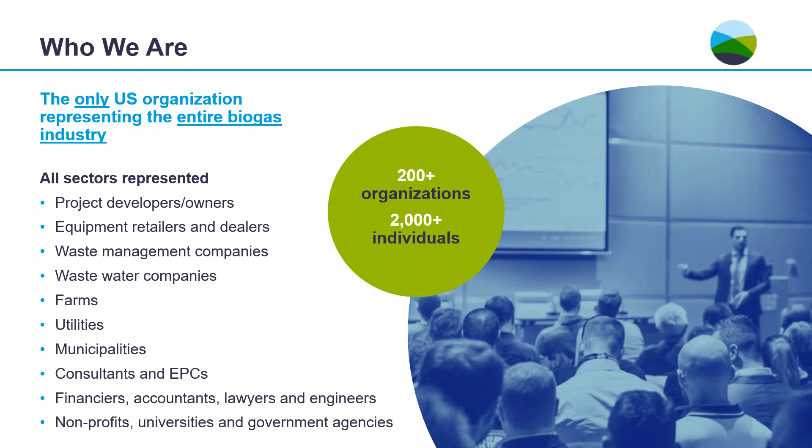First of all, thanks for everyone coming. It's a great turnout and it's appreciated. When we were in Vegas this year, it was very obvious that the market itself, the biogas industry, has evolved quite a bit. I was marked by the idea that it had really changed from something that was very aspirational, you know, at the Red Lion with everyone wearing Birkenstocks, to a situation where we're in Las Vegas with some public companies, a well-funded organization, and real leadership from the American Biogas Council. I was really marked by how it had gone from aspirational to inspirational.

I felt like now would be a good time to talk a little bit about some of the opportunities that the market still has, some of the challenges that can be overcome. We've been talking to the Danish companies regarding the markets and the challenges they've had and how they've overcome them. So we thought it would be a great opportunity to look at some of these lessons learned and potentially take some of that information to help continue to grow the North American biogas market.

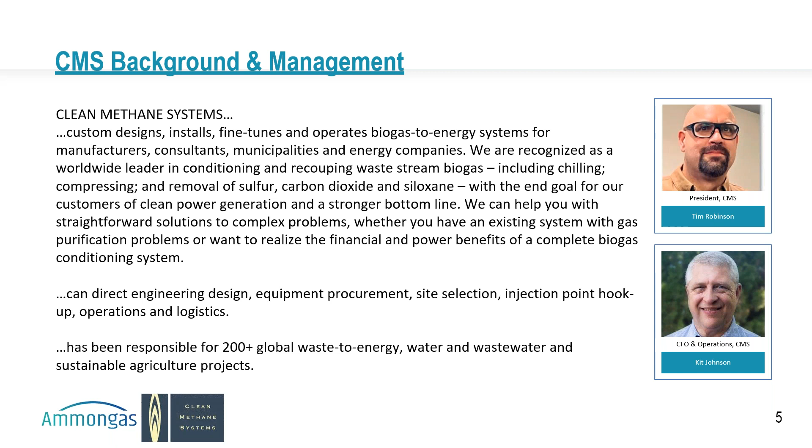So just to talk a little bit about Clean Methane Systems, next slide please. Clean Methane Systems has been in various forms in the industry for quite a long time. It really started with Paul Tower helping Sacramento County with their GE turbines in the mid-90s, where people learned about things like siloxane as it relates to biogas and why the turbines were fouling. We've been in the industry right through the Energy Policy Act and the American Recovery and Reinvestment Act, all the way through, hopefully, the 2022 new legislation coming out here in 2022. The market, we've watched it really evolve over a long period of time and been able to participate. So my goal today is really to help provide some context and lessons learned as these very successful groups from Denmark talk about what they've done and how they've addressed some of these market challenges.

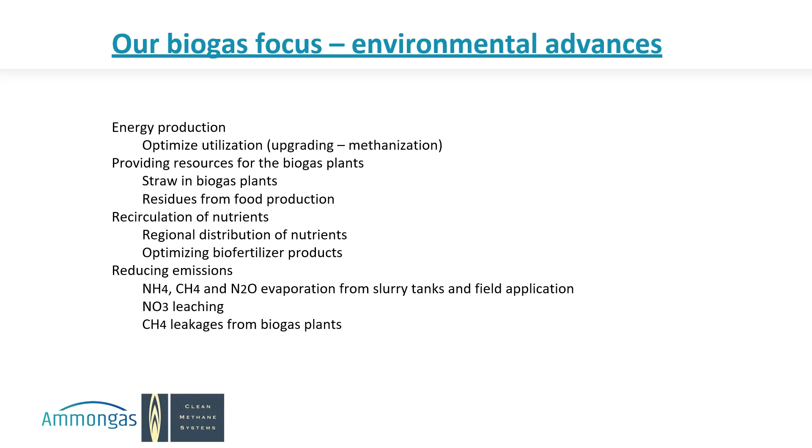Next slide please. There has been a lot of incentives for biogas production in Denmark, and the development of biogas production in Denmark has accelerated very fast the last couple of years. There has been dedicated government support schemes, taxes on consumption of fossil fuels, some restriction on the use of fertilizer and manure on the fields, a ban on organic waste in landfill sites for more than 20 years, and a fee for waste treatment. Most of all, there has been a very big interest from the governmental side to support the development of the biogas sector, including establishing a biogas task force, and support for research, development, and demonstration of various new technologies.

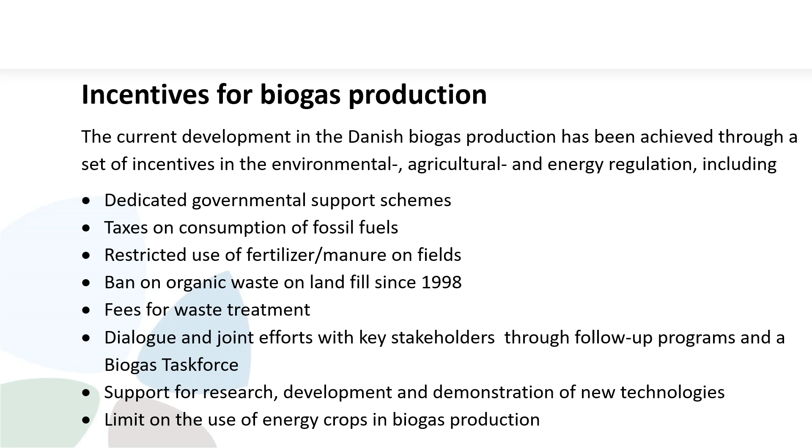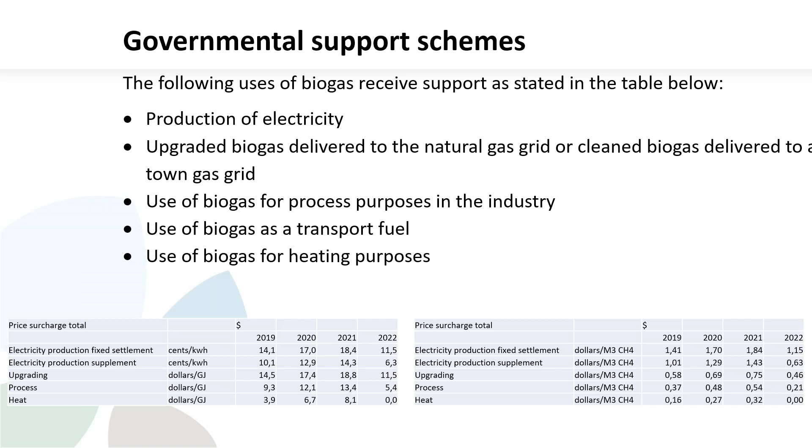Then last year the government came up with a green gas strategy. What role does green gas have in the transition of our society?

This was made last year, but now the awareness and actuality of this has increased because of the unfortunate situation in Ukraine.

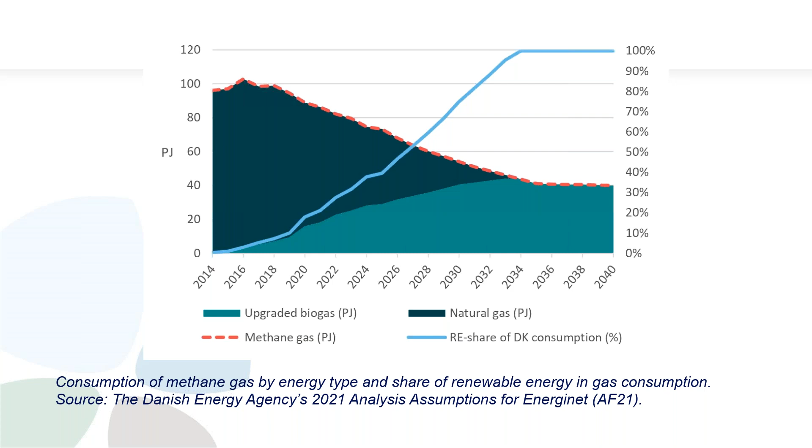We started out with a traditional gas market model where we had a biogas plant producing biogas and using it in a CHP, combined heat and power plant, and used it directly for the consumers.

Then in 2012, we had the possibility to upgrade the biogas and inject it into the gas grid, which is widely distributed all over the country. That increased the possibility to sell the gas to a lot of other consumers, to sell the production all year round, and not only the electricity.

When you make electricity out of biogas on a CHP, you get about 40% of the energy as electricity, and the rest as heat. But for most of the year, we are not able to use this surplus of energy as heat in Denmark. If we inject it into the gas grid instead, we can use all of the energy all year because there are a lot of other consumers.

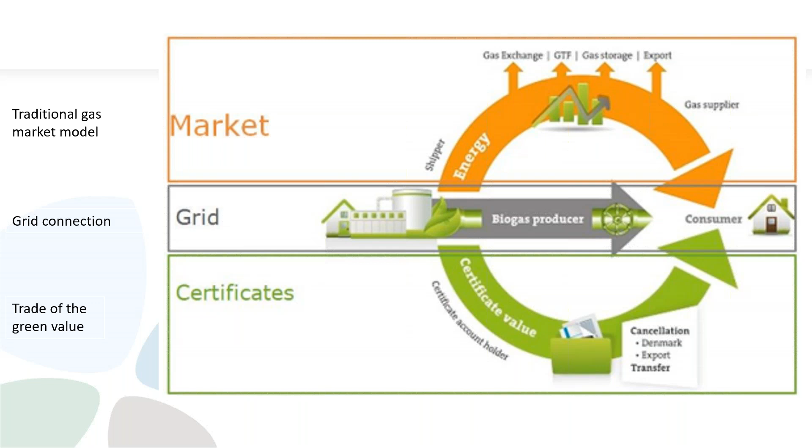That also meant there was an opportunity to trade certificates, meaning certificates that guarantee the origin of the gas as green gas, and a lot of companies were willing to pay an extra price for these green certificates.

In Denmark, we have had a very stable energy consumption during the last 30 years. In fact, our total energy consumption has dropped a bit, and we are very proud of that - that even though society has developed very fast, our energy consumption has decreased.

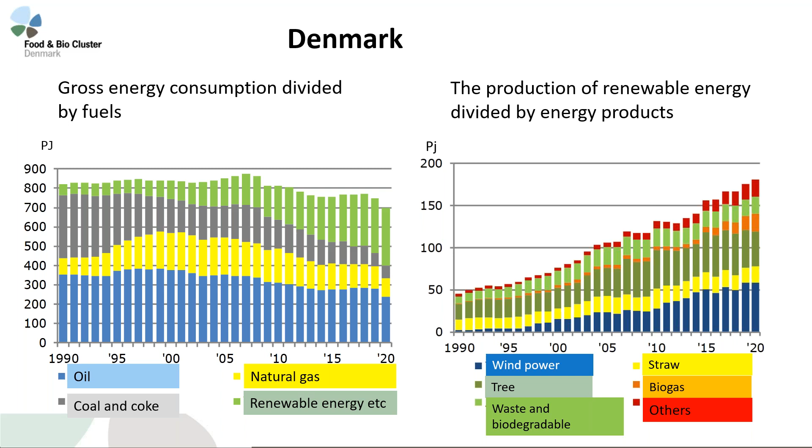On the right side, you can see we have a very long history in Denmark of making wind power, and we have a lot of credit for that around the world. But in fact, it's biomass that makes a bigger contribution to the energy system than wind power does.

This shows the development of the amount of biogas in the Danish gas grid. As you can see, last year we reached about 25% of the whole gas consumption in Denmark as biogas.

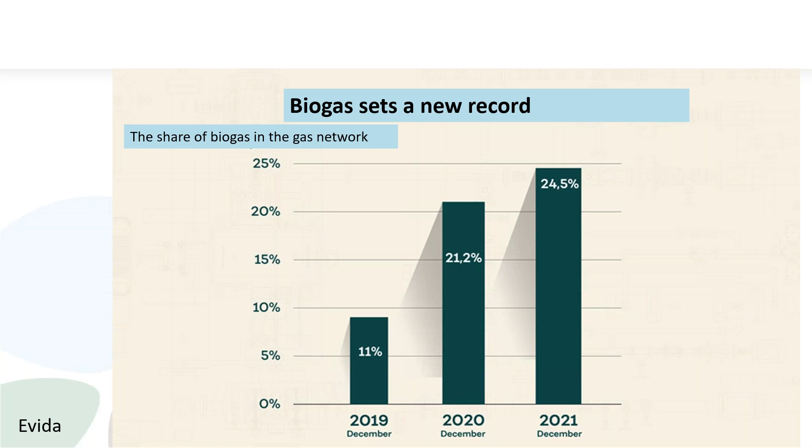This biogas is made of biomasses, and the main part of the input for Danish biogas plants comes from slurry and manure, deep litter, energy crops, and residues from industry. This is for the farm-based plants. We also have plants running anaerobic digestion on our wastewater treatment systems, where the wastewater delivers the organic part. As you can see, only a minor part is done by straw, about 1%, and I'll get back to that.

This means we have a very big input of slurry and manure from animal production, and in fact Denmark has a very big animal production compared to our size, meaning we produce about 5 times as many pigs as we have people.

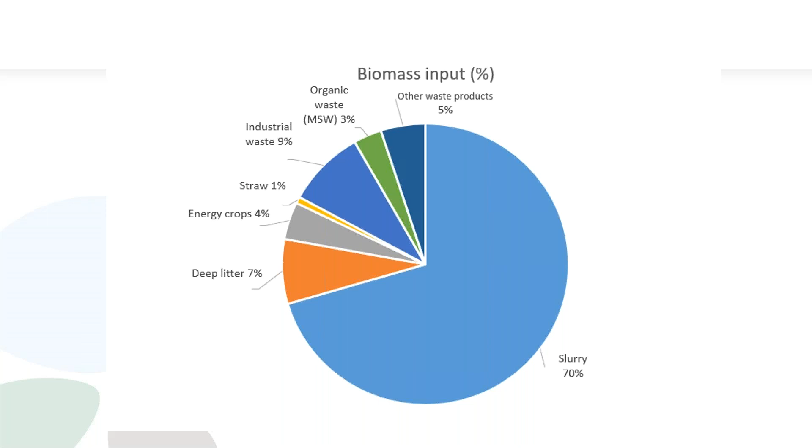We try to optimize the energy production in these biogas plants. As I said before, we started out making biogas plants fed with manure, slurry and organic waste, using the biogas in CHP plants, meaning combined heat and power, normally engine systems, generating electricity and heat.

About 40% of the power or energy coming in is coming out as electricity, and the rest is coming out as heat, either as exhaust air or as cooling water.

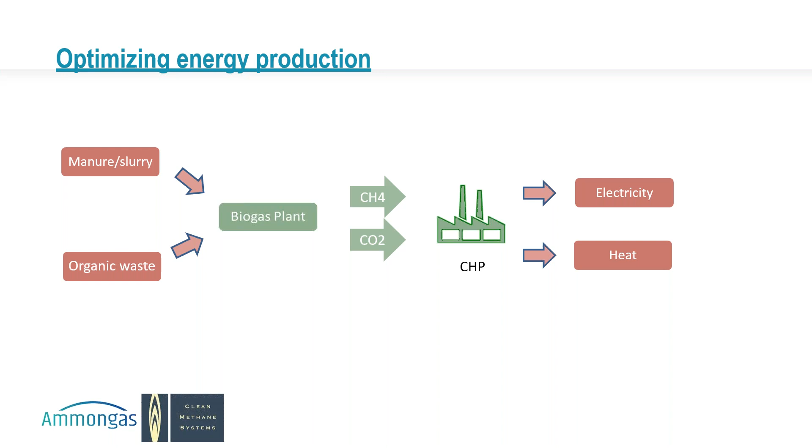In 2012, we had the opportunity to upgrade and inject this biogas into the gas grid, normally used for natural gas. That meant that all the new and bigger plants installed upgrading facilities, and you'll hear more about this later. That meant that the methane from these upgrading facilities could be distributed and used for heating, for transport, for process energy, and so on.

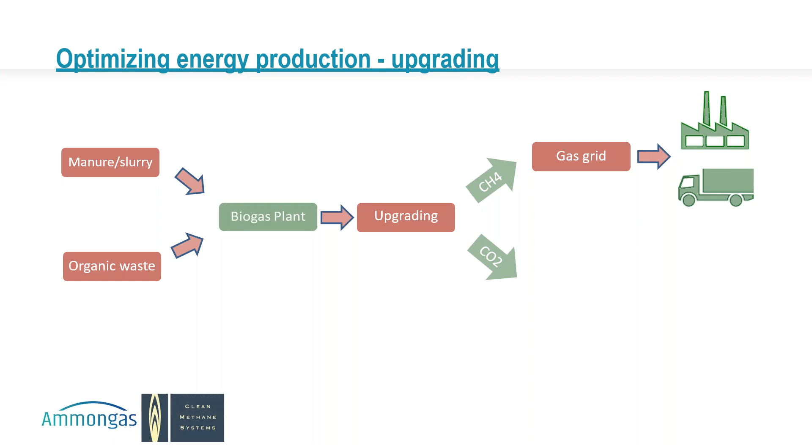The next step is that when you produce biogas, 65% of the gas is methane and most of the rest is CO2. That's a loss of carbon if you just discharge this. If you have the possibility to generate hydrogen from renewable energy sources like windmills or solar panels, you might be able to produce hydrogen that can be combined with the CO2 to make even more methane. Instead of having a gas coming out of the upgrading facilities with a loss of 30 or 40% as CO2, you might have a gas that's 99% methane when you do this methanization.

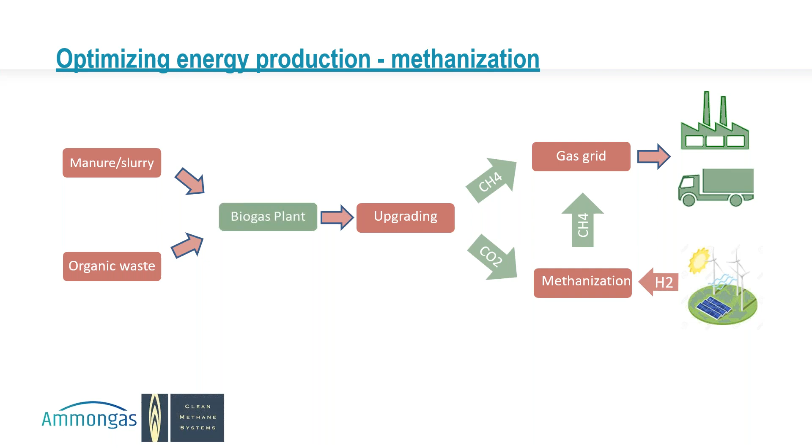One of the optimizations here is that we have a very big surplus of straw in Denmark, and this is a very abundant and reliable resource. We see this as a possibility to boost biogas production from the biogas plant. Manure is, in fact, a very poor biomass for biogas because it's perhaps 5, 6, 7% dry matter and the rest is water. So if you have to increase the feasibility, you have to optimize by adding some biomasses with a higher energy potential and at low cost.

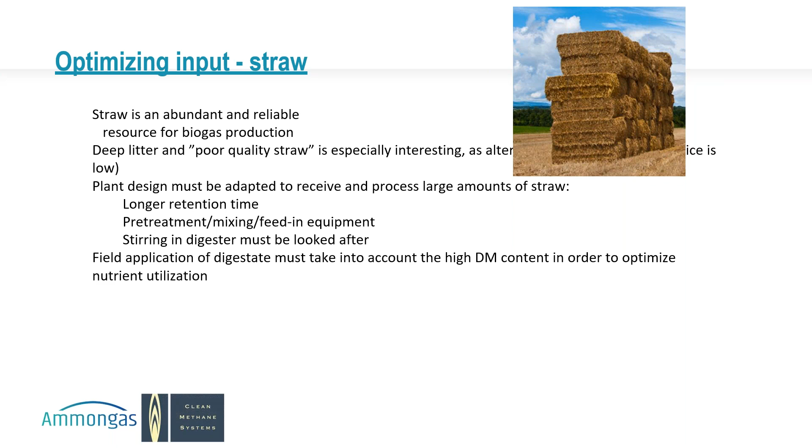We try to do that by using deep litter and poor quality straw, and then you have to design the plant to adapt and receive this type of biomass. That means you have to choose between options like pre-treatment, longer retention time, and several other options to find the optimum and the feasibility suitable for your plant.

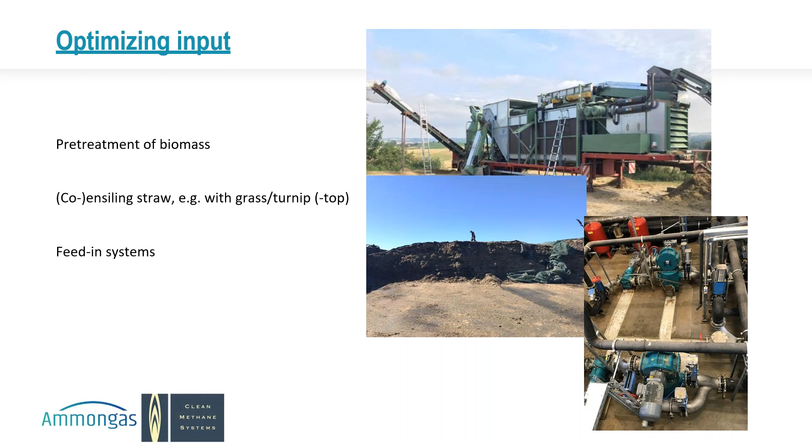We also have the possibility, with big biogas plants, to separate the digestate, meaning you might be able to make specialized fertilizer with a higher value than just manure. For example, we have trials making special starter fertilizers for maize, since maize needs a lot of phosphorus at the start of the growing season, and we have different possibilities to move phosphorus from various fractions of the digestate to optimize the use of the digestate.

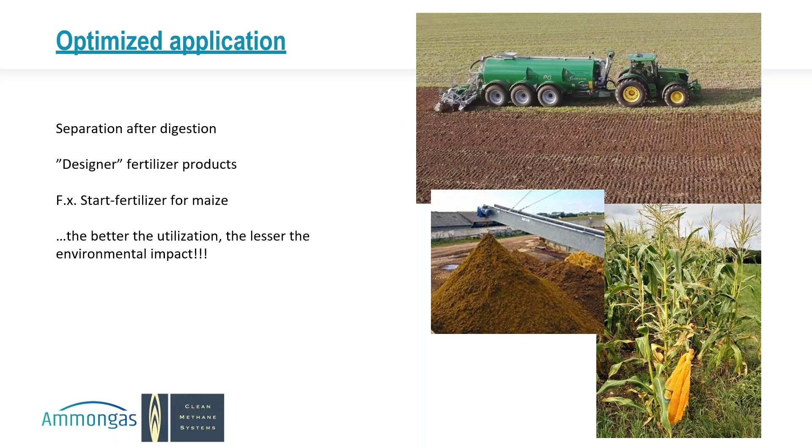We have been working on a project called Biogas Go Global for four years now, together with the Foreign Ministry of Denmark and the Danish Energy Agency, to promote Danish biogas knowledge and Danish biogas companies and their way of doing things, especially on the American market. This has been quite successful, and some Danish companies are now on the American market, and you'll hear from one of them later on.

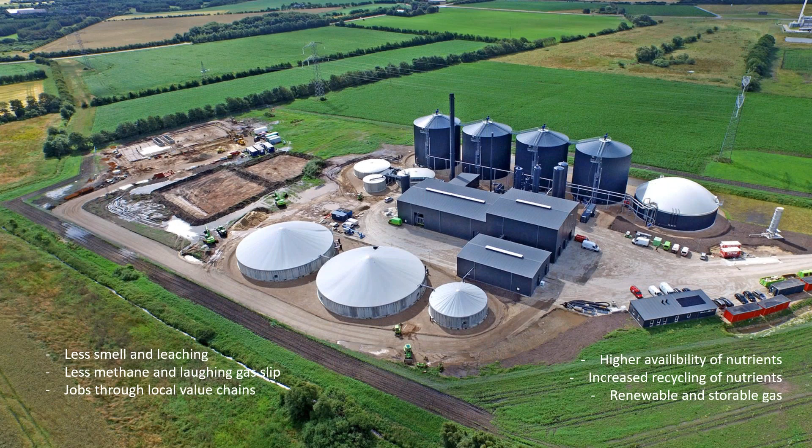Great, so a couple things here. Another polling question, if you guys don't mind taking a minute to answer. At the same time, Michael, there's a number of questions related to feedstock and how that's going to help you meet your gas production expectations and projections. You mentioned straw, but do you think you have enough feedstock to get to 10 times your current production to meet your future requirements? Can you speak to that a little bit?

Yes, as I said before, we have a surplus of straw production in Denmark, and compared to our size, quite a lot of it. We have about 6 million tons of straw each year, and more than half of it isn't used for anything. At the moment, only a minor part of the manure and deep litter from animal production is used for biogas. Of course, there are some issues because previously we used a lot of residues from factories and industry as a high energy content biomass for biogas production, but all of that is spoken for by now.

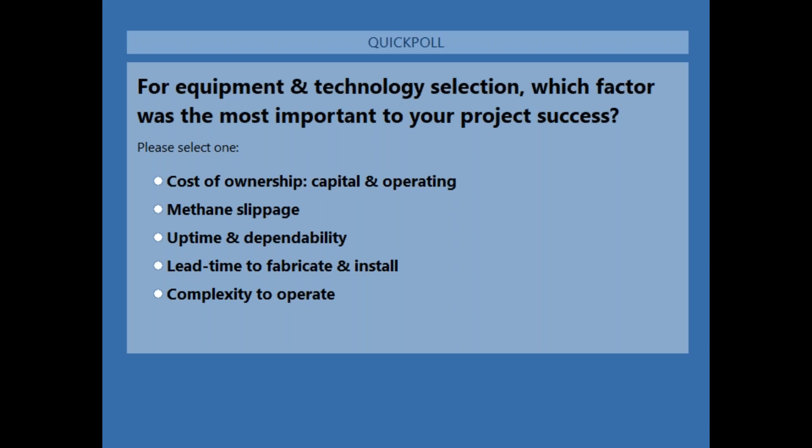Great, thank you. I think feedstock, as you were speaking to it, was also the number one concern in our first poll, so I thought that was pretty interesting. Yeah, of course that's interesting. That's also the first part you have to do when planning for a biogas plant - making a calculation of what kinds of biomasses are available and in what tonnage.

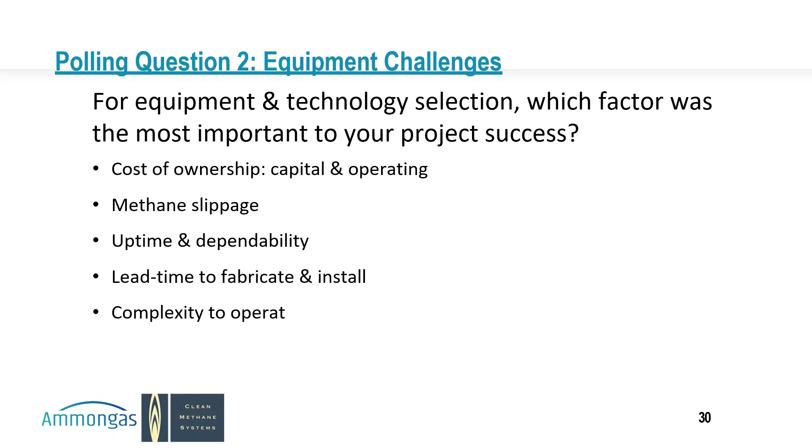In preparation for handing this off to Christian, we'll go through the poll results really quick. There's an obvious concern here on this polling question. 44% of respondents thought cost of ownership, capital and operating costs, were the number one concern, followed by uptime and dependability, which is a really good lead-in for Christian. This is actually the reason we reached out to Ammongas a few years ago and tried to find ways of making these projects more dependable, less expensive to operate and procure, and also really make them repeatable. One of the big challenges in the industry is sometimes traditionally these projects are a little bespoke each time. So I think Christian is going to go through this and answer those issues very specifically with technology.

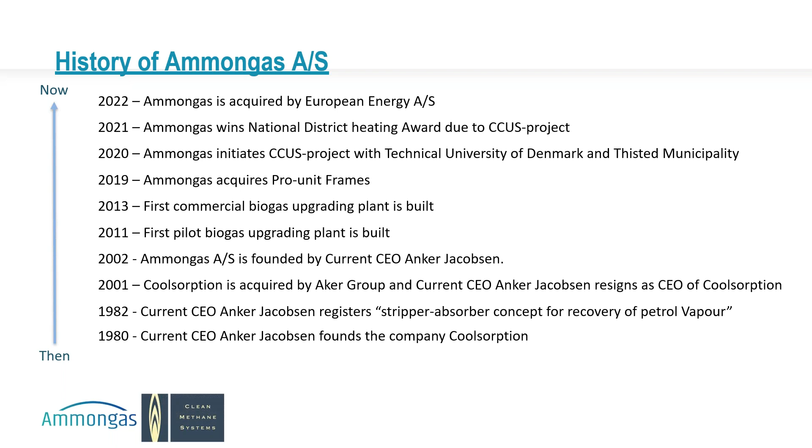Our headquarters are in Copenhagen, Denmark, and we have a track record of plus 40, more like 50 plants around the world. As of now, 3 are being built in the US, and should be finished by spring. Our main focus has been biogas upgrading, but due to the heart of the process being CO2 separation, we have branched out to carbon capturing and CO2 polishing. The last part entails removing CO2 content in either natural gas or biomethane down to below 50 ppm of CO2, which means the natural gas or biomethane can be liquefied.

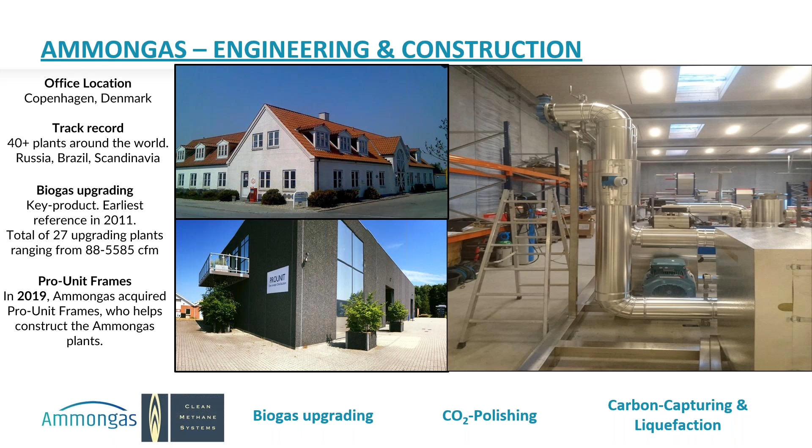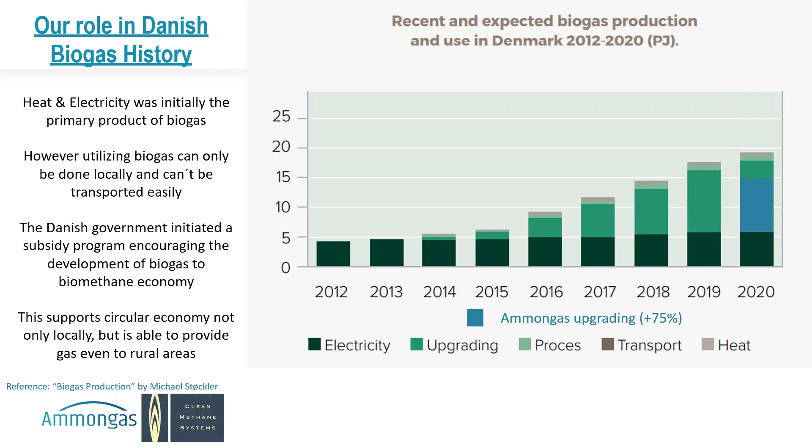So again, why is our role important in regards to the Danish market? Due to the heavy involvement of Ammongas in biogas development, we have been very privileged to have approximately a 75% market share in 2020, when the market was at its peak. But as with every market prior to a biomethane economy, biogas was primarily used to locally generate electricity and heat. As Michael mentioned, there were governmental incentives and a push towards a biomethane economy. So within a time frame of 7 years, the biomethane economy skyrocketed, and we saw exponential growth in biogas upgrading and biomethane injection into the natural gas grid. And keep in mind, this is without the current market developments and demands for clean CO2 as a byproduct.

In general, another element is that because we can push the compression part onto only the biomethane stream, and not have to compress the CO2 or raw biogas itself, we only have to compress half of the gas, which means we can save on power consumption. Our amine system, since it does not require any H2S removal or pretreatment prior to upgrading, means we also do not risk any kind of bottleneck or adding pollutants to the raw biogas.

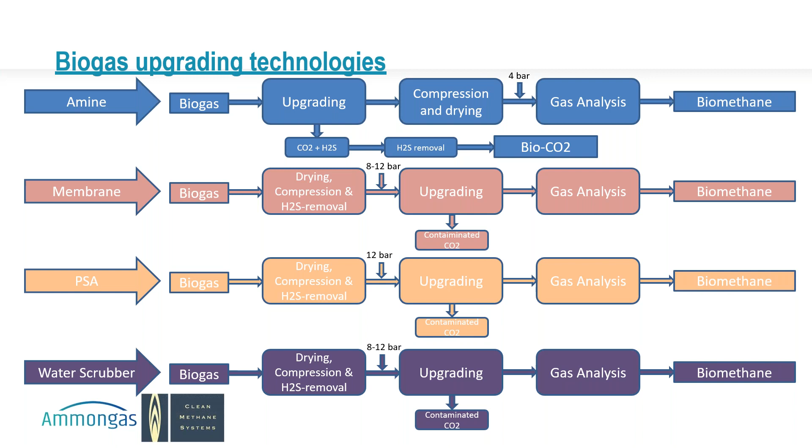Going more into detail with the Ammongas biogas upgrading technology: the raw biogas is directly injected into our plant, where it separates the CO2, then we have the steps of compression of the biomethane, drying of the biomethane, and gas analysis of the biomethane, and from there, injection or virtual pipeline, whichever you prefer.

One of the major differences is that we do not have any pressure in our system except for the gas conditioning part, which we introduce at the end. This means elements like legislation or permits are much easier to come by. And because we only compress half of the gas, we have low electrical consumption. We also have no pre-treatment of the biogas; we simply take it through our system. And due to not having a mechanical process, we are able to guarantee a methane slippage or methane loss of less than 0.09%.

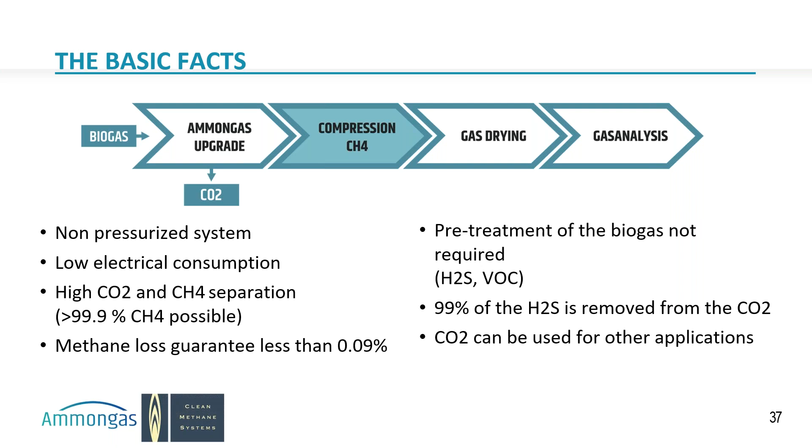The principle, as I mentioned, is chemical in nature. It's a technology that has been used for many years, over 50 or 60 years, in the gas and oil industry, and we have basically specialized it for biogas upgrading.

The principle is a chemical absorption-desorption process where the raw biogas is injected into the first absorber. From there, the CO2 reacts with the water that comes in, creating carbonic acid. Then our amines solvent reacts with the carbonic acid and travels to the second column, the desorber, after entering through a heat exchanger. We add heat, and from that process we strip the CO2, the H2S, and the water content at the top of the desorber, so that the amine that was binding with the CO2 is cleansed and can be recirculated into the system. Then the process reverses.

As mentioned, the first column, the second column, and the liquid handling between them make the principle here quite circular economy wise, and we try to keep the amine consumption at a fairly low level.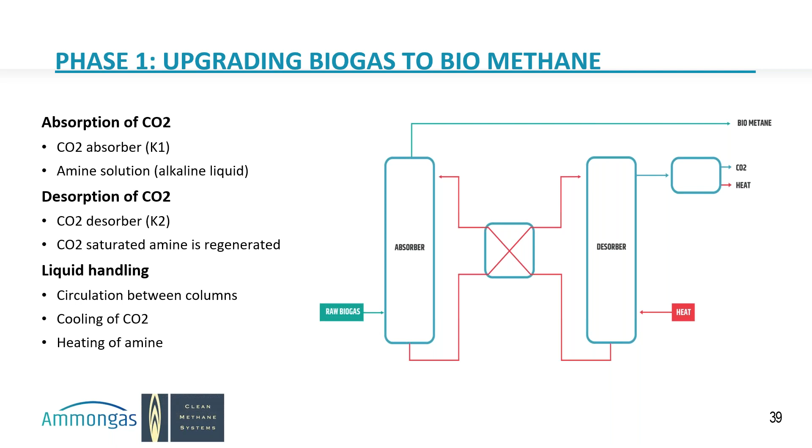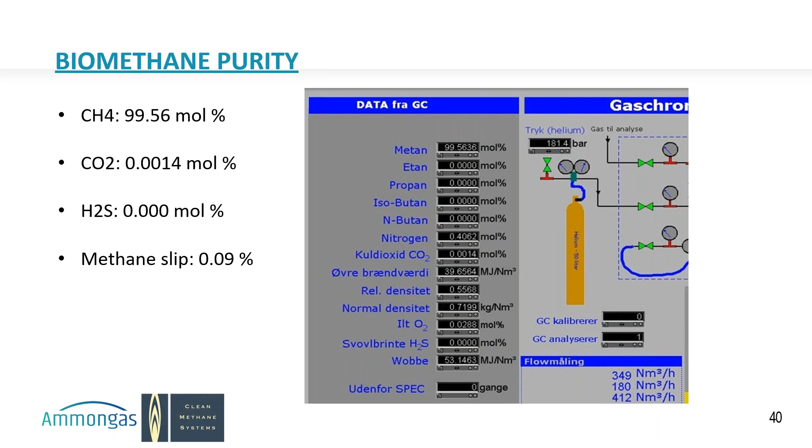As an example of biomethane output, we have a screenshot from a plant that achieves 99.56% pure biomethane, with 14 ppm of CO2 in the biomethane stream, which means it can basically be liquefied. The H2S level is non-existent, and as mentioned before, our guarantee for methane slippage is 0.09%.

Why I continue to mention methane slippage is that, when we talk about biogas, low methane slippage is crucial to optimizing these income streams. Because the process is a very natural chemical reaction, nothing is forced, and amines technology is known to have the industry's lowest methane slippage in biogas operations. In Denmark, as Michael mentioned earlier, methane leakages at biogas plants are meeting tougher and tougher legislation, so keeping an eye on methane slippage is not only creating additional income now, but may also serve a good purpose in the future if such harsh legislation is introduced in the US.

As I mentioned prior, power consumption is pretty much based on the compression part, and since we only compress half of the gas, we have half the power consumption or less compared to other technologies like PSA, membrane, and water scrubbing technology.

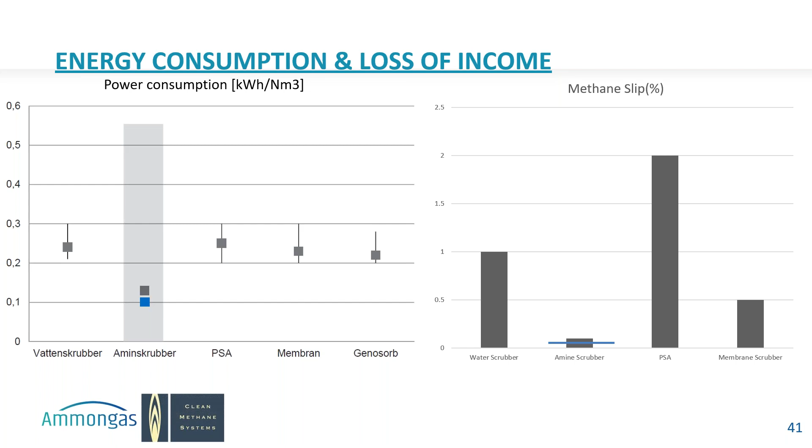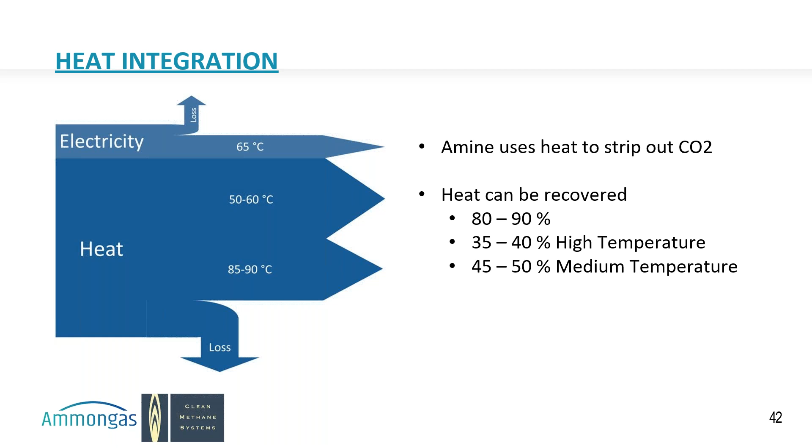We do have another concern as a technology, because our system is not power-based, it is heat-based. This is quite important for us, so when we install a biogas upgrading plant, we are able to integrate the heat with surrounding areas. In general, we recuperate 80 to 90% of all the heat we use, and since heat is a lot easier to recuperate than electricity, we are in a pretty favorable position regarding OPEX. About 45 to 50% of that will be medium temperatures at 50 to 60 degrees Celsius, I'm sorry, I don't have that in Fahrenheit right now, and then 35 to 40% of that is high temperatures.

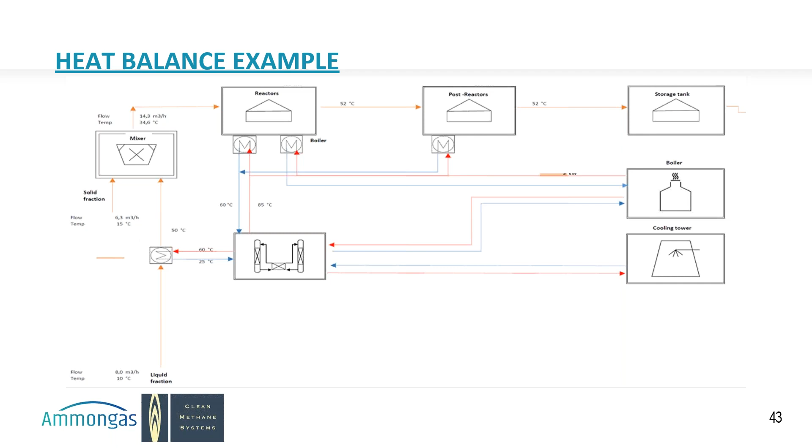As an example, we will divert from getting the heat to our process. We will divert high temperatures to the reactors, to mixers, post-reactors, anything that basically can take off our heat. We will try to integrate with the surrounding areas, reaching up to 90% of heat recuperation.

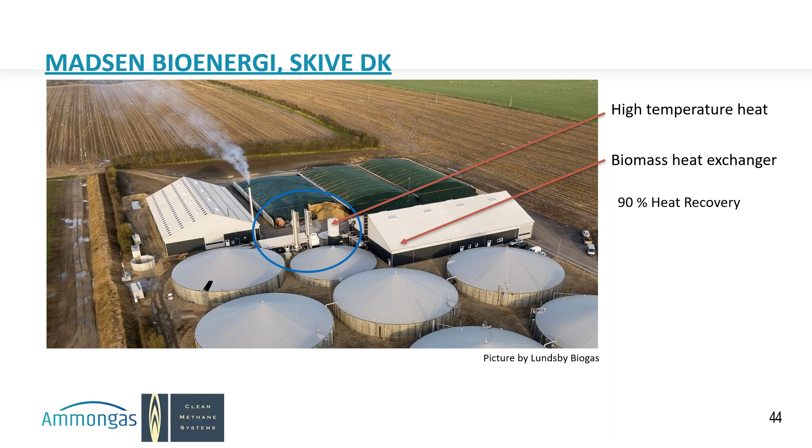When it comes to the production part, we produce most of it in Denmark, but we are also outsourcing to the US at the moment. We are producing everything in high quality stainless steel, typically SS316, and we use renowned sub-suppliers for top quality. We build for easy maintenance and access through our plant.

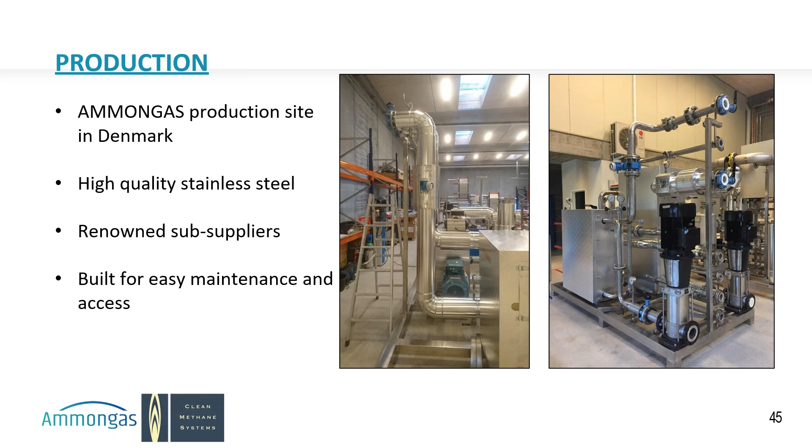When it comes to biogas upgrading and the typical narrative for when to use amine, I think it's quite considered that when you are considering a large biogas upgrading plant, there is an economy of scale when applying a chemical process like amine upgrading, since the frames or the piping just get larger. But I would differ and say that even in small sizes we will be able to be quite competitive. As an example, we have already sold 3 projects in the US, and our first 3 projects are below 500 CFM, so I think that makes a pretty good case.

When we're building at those sizes, we build everything in container-based solutions, sending it in one frame, and we are able to fit it accordingly in a technical house or anything like that as well.

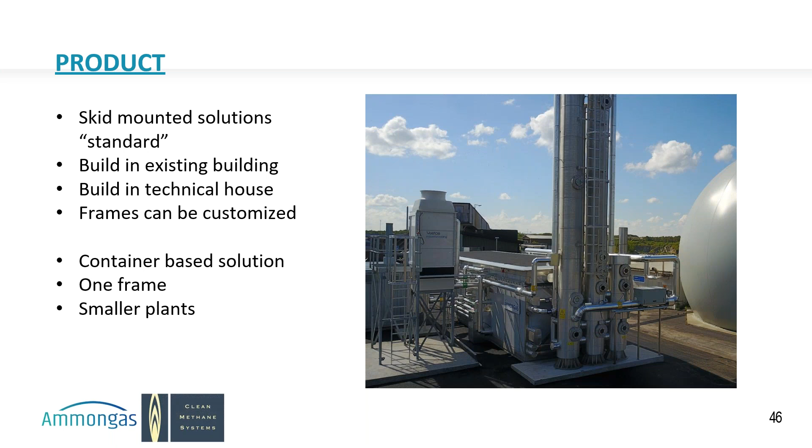So here at the end, just going through a bit of our references. This was actually our first plant, at a capacity of about 150 CFM. It was commissioned in 2011, and it's currently been re-engineered into our first carbon capturing pilot plant, which has been shipped around in Denmark to test different district heating companies and see how we can help with different solutions in that regard.

We always have a very close collaboration with customers and suppliers. Out of the 27 biogas upgrading plants we have, about 25 of those have a service agreement with us, which tells about the close relationship we intend to keep with our customers.

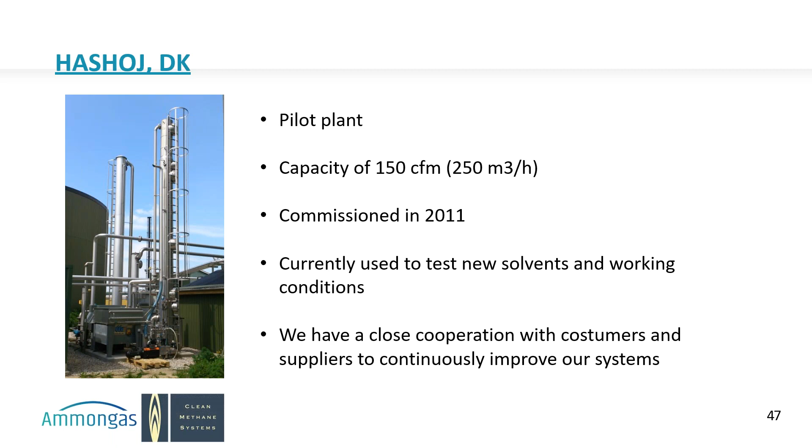As a fun example, this containerized solution, the plant you just saw before, is being shipped around in Denmark and tried continuously at all kinds of different sites.

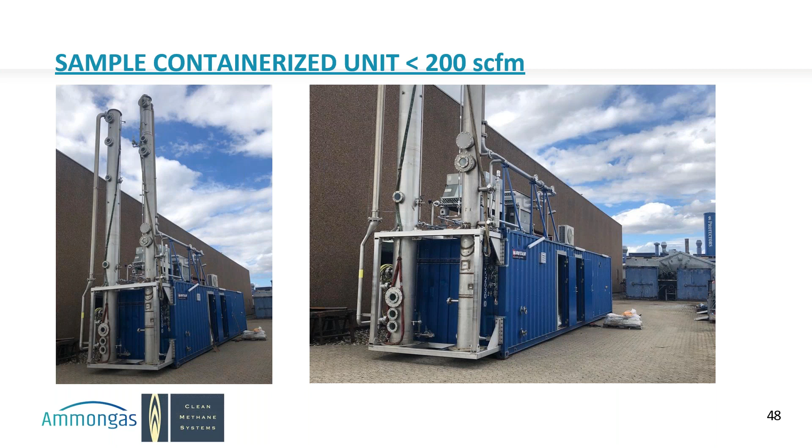Here we have 2 other small ones, one in Norway and one in Finland, at 180 CFM. The one built on the left in Hamar is built entirely inside a building, and the one on the right is a containerized solution, as you can see.

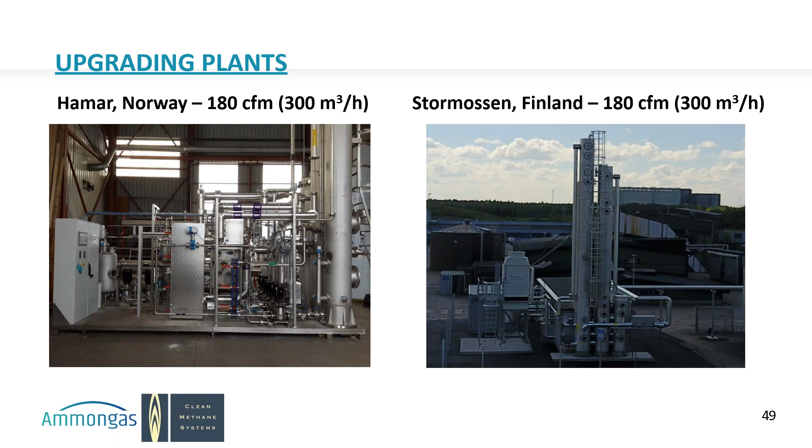As I mentioned, it's about economy of scale, so in time we make the columns bigger and the piping bigger. Here in Skive we reached 700 CFM, and the one on the right, 765 CFM, built in 2013.

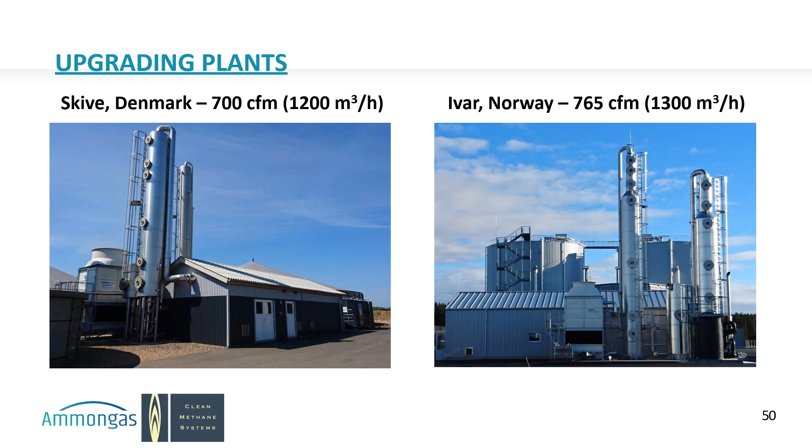As an example of what I mentioned earlier regarding biological desulfurization and how that can differ when applying it for this kind of setup: in Denmark it's also very popular to use these biological desulfurization processes, as the economics are quite favorable compared to activated carbon filters. On the left you can see the annual consumption figures for activated carbon, and on the right, the annual consumption figures for fertilizer used in the biological scrubbing system. While the biological scrubbing system may cost the same as the total annual expenses for 1 year capex-wise for building it, within 1 year we see that the total capex plus opex turns around, so that the activated carbon filter, based on opex, becomes more expensive.

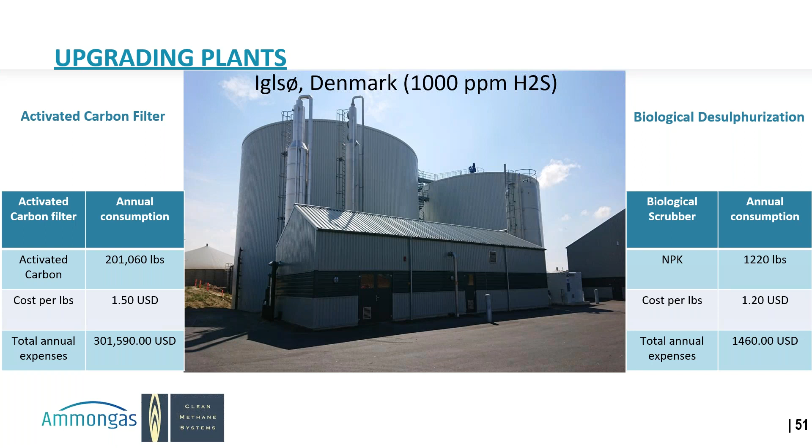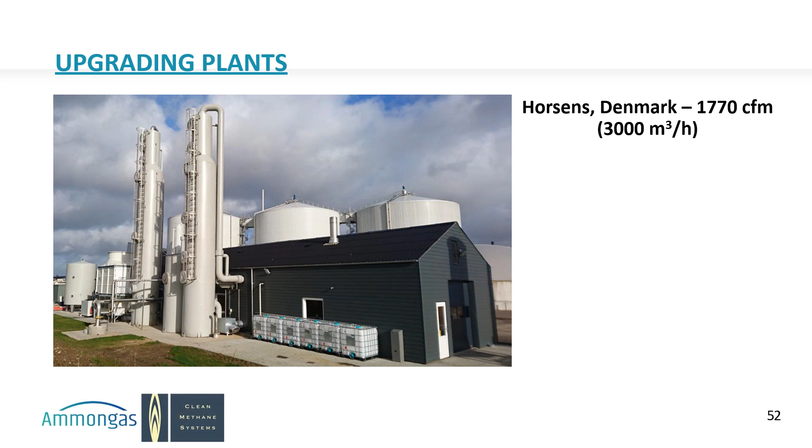This again, we're just going a little bit bigger in size. This one is at 3,000 cubic meters an hour, and as you can see, we have a technical house installed in collaboration with local companies as well.

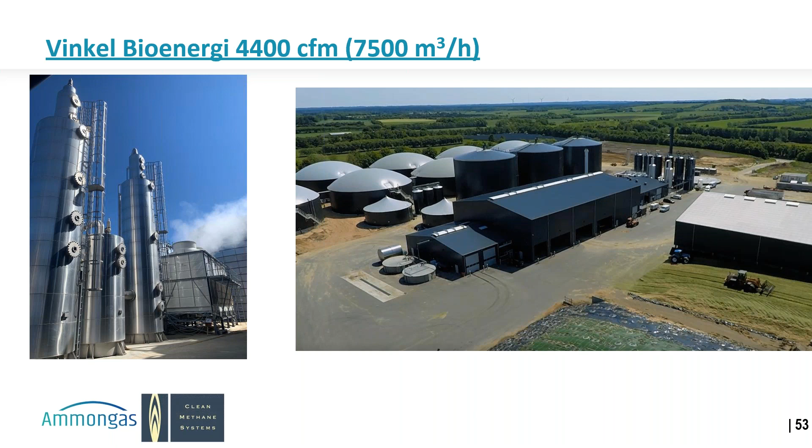A couple, I think it was about a year or 1.5 years later, the customer came to us and said, you know, we secured more biomass. How can we increase our capacity right here and now? So through some small additions of changing out a pump and a drying system as a bottleneck, through a small price of maybe 400 or 500,000 US dollars, we were able to change from the previous 4,400 to 5,400 CFM, and now it's actually at 5,600 CFM.

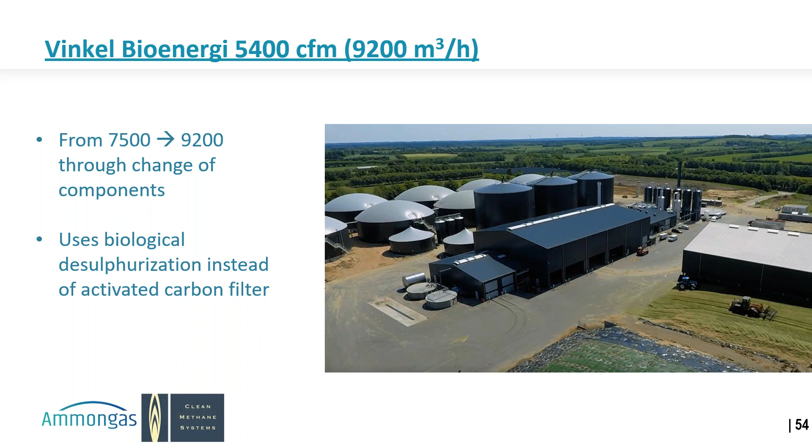And as mentioned, also, I think it's really important to keep in mind, because we are trying to do that now in Denmark also, that we have this free byproduct of CO2 that comes out now. And as Michael mentioned, there's going to be more and more ways to utilize the CO2, and it becomes quite a good way of monetizing additionally on a circular economy in this case. As I mentioned earlier, it can be used in greenhouses, industries locally, green hydrocarbons, soft drinks, etc. And through that, utilizing the CO2, the biogas production not only becomes carbon neutral, but actually carbon negative.

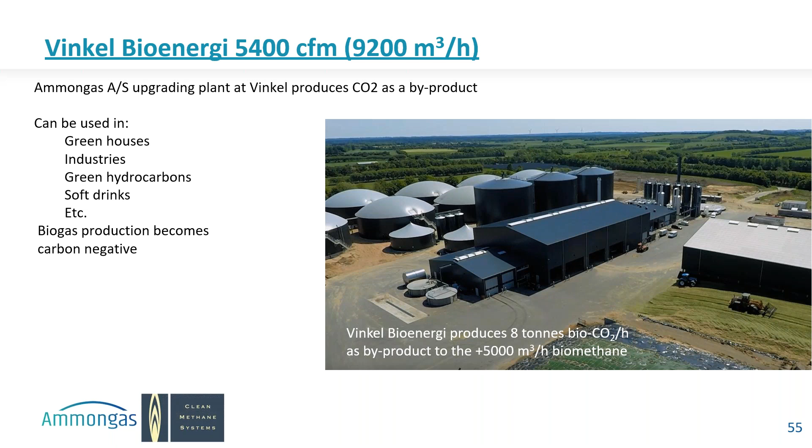Next slide, please. I think that's it for me. Tim, take it away. Right on.

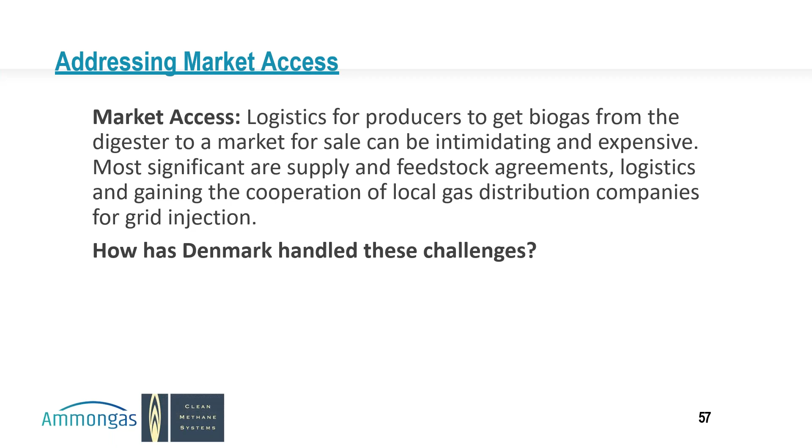Right now we tend to drive to higher volume, higher return projects for a variety of reasons. But technology like the amine gas technology does a couple things by significantly driving down operating costs and making projects more predictable from site to site. It's always been a challenge for clean methane systems—two 500 SCFM systems might have totally different operational costs and technology use, making them hard to replicate and more expensive than they should be. This technology allows us to replicate these systems and have much more predictable operating costs.

That's largely driven not only by not needing so much compression and other treatment on the whole gas stream, but this also allows you to manage hydrogen sulfide very cost-effectively in a way many other options don't allow. For those not familiar with the finances, generally speaking, H2S removal is a very expensive part of these projects.

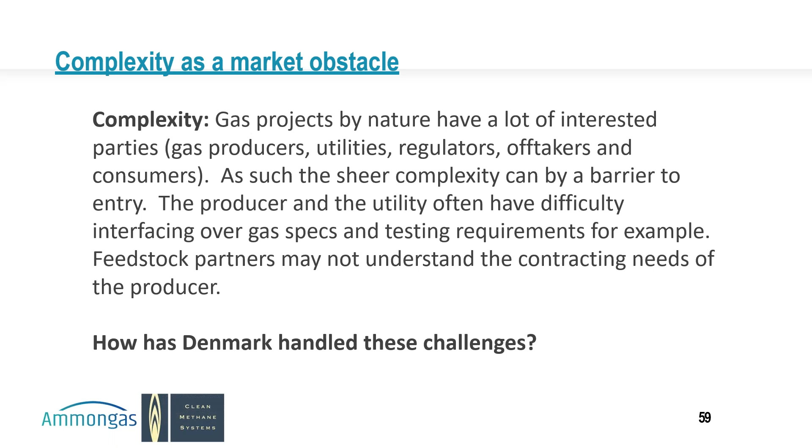And those vehicles can be financial guarantees, or they can be product guarantees, performance guarantees. There's a number of things that are generally available that need to be baked into this as you start looking at these projects. So even if the numbers look great, you have to have the contracting mechanisms in place to mitigate enough risk to actually get these monies released, generally speaking. And so that can be a fairly frustrating portion.

So I mentioned the export bank for Denmark, because that is one of the tools that is available and has been offered on these projects so far. Other tools are the performance guarantees for the systems, and just generally speaking, one of my favorite things about the amine technology as an upgrading technology is actually that most of the upgrading operational risk is actually switched from the product gas to the tail gas side.

Normally you're trying to manage product quality or gas quality for the entire gas stream in traditional systems, with membrane systems and others, by separating the product gas early in your upgrading process and sending that one way, and then taking the hydrogen sulfide and the CO2, separating that, bringing it to another direction, and trying to manage those contaminants on the tail gas side.